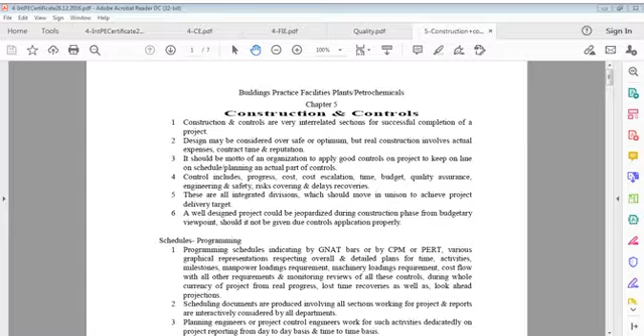So it's coming to your revised file of health safety, and it's coming to your revised file now. This is here, you can see it's a revised file of safety which I'm talking about, and this is health safety environment - I just put in there about COVID, and this is very much an engineering issue, we cannot avoid it.

I say 50% of world infections are in India, Bharat - why? Medicines, oxygen issue, hospitals, beds issue, doctors, nurses issue, ventilators issue, infections millions daily.

What we should do, that's a question mark, and we have to think on this. If we do not think, we do not do justice to ourselves. That's a very important part of this. And if we do not do justice to ourselves, we do not do justice to anybody. That's a point of concern. I don't know why people call for money.

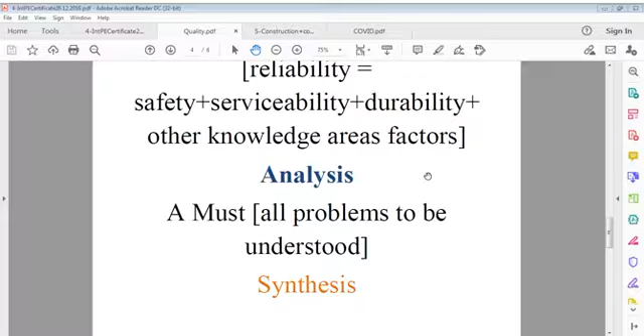There may be any number of problems in one issue. Each problem requires to be analyzed, and all analysis done for that problem must then be understood and combined when we get solutions or answers or responses, and that is called synthesis. And that is what engineering is about, all based on thinking, the activity of thinking and reiteration all the time.

And that thinking leads to formation of some format, some form, you may say, in some formation - a kind of template, and that is called in-depth thinking. Based on that template a formula is generated to solve that problem, and that's called innovative engineering, or applications must be affected - a kind of application is generated. That's the basis of engineering, which is use of mind to find solution. That's what we say.

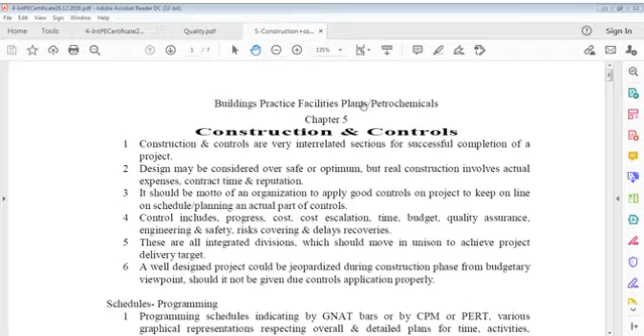I take this close of COVID-19 currently. We'll say now, as I was talking of construction and control last time, I was talking of everything in construction - how does it happen? We talked of various sites, various procurements. We talked of construction project management.

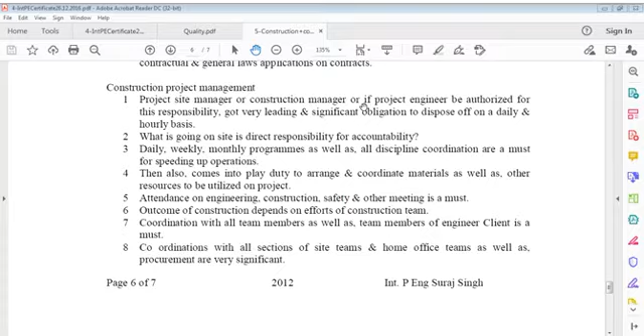And we talked so much on that. Controls, everything we talked of is all very important, and we have to understand what these are. If you don't understand these, we cannot do anything. We cannot reach a certain conclusion, and this is a very important part of life, that we have to understand that.

Then we have to see, in this, about facilities on show - I'm just trying to find this. We have talked of general topics, we have talked of project design, contract awards, and we have talked about engineering facilities, and we can say now project management, facilities, petrochemicals. Let us see what's that.

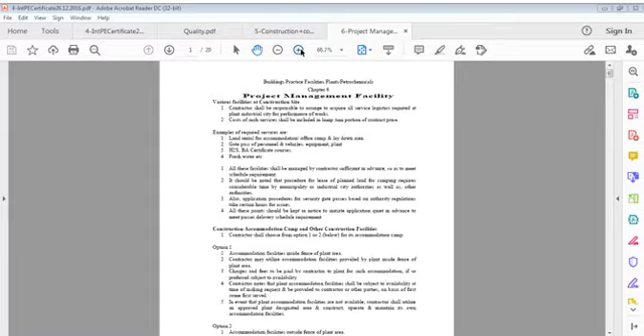Let's open this chapter now, which is, you can say, chapter 6 in this case. It says project management facility. Now, what actually is a facility? That's the point here - what we call a facility, what we call no facility. When I say facility, this means a kind of productive facility, a kind of facility of production or service. Let us say crude oil is converted to petroleum products, gasoline.

That is a facility that obtains crude oil from offshore and converts it for use for petroleum production, and there are so many byproducts, and those byproducts are further treated or produced.

Or if no project facility, I can say various facilities at construction site. Now what it says is contractor shall be responsible to arrange or acquire all service logistics required at plant, industrial city.

For performance of works. Here contractor means whoever is responsible to work for the project.

That company or organization shall be responsible to arrange, to acquire all service logistics required at plant, industrial city for performance of work.

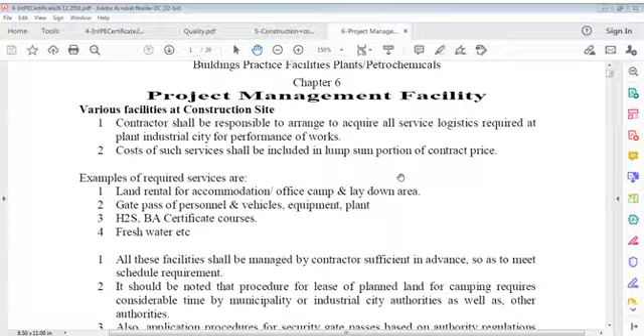Now what examples should we give about these services that can be considered like that? Land rental for accommodation, office camp and lay down area - these are essential. Gate pass of personnel and vehicles, equipment, plant - these are also mandatory.

In facility areas, which are protected or prohibited areas for the general public, these projects go on during construction, and everybody cannot enter there.

There is some control, some reservations on who can enter and who cannot enter on those projects. So you can say gate pass is a protection against unauthorized entry.

That only requires those people who have to work there to enter, only those vehicles which are authorized to enter, and that equipment I mean heavy machines like crane, mobile pump, transit mixers, trucks, excavators, or whatever else involved, and whatever plants.

And also certain certificate courses, whatever for training of personnel, and fresh water.

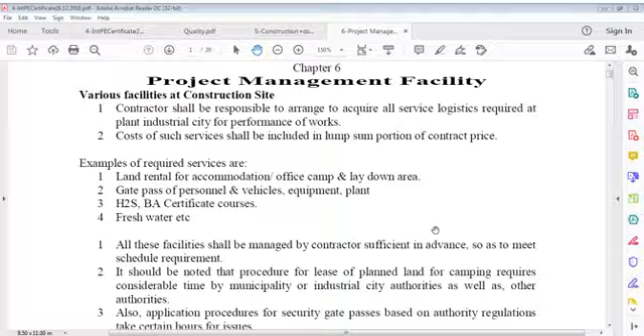This is just a small list. This is not necessary that this is all. You can add anything to that, no problem, you can add what you want to add. These facilities which are required, which are a must.

Shall have to be managed, should be provided or organized by contractor sufficiently in advance, not at the 11th hour.

According to requirement, according to schedule, managed by contractor sufficiently in advance, so as to meet schedule requirement.

It should be noted that procedure for lease of planned land for camping requires considerable time by municipality or industrial city authorities as well as other authorities.

And this depends on the location where your project is, what the procedure is, which actually the contractor should know and the authority should know, and that time must be covered.

And it should start from the very beginning, and I think during the bid stage itself this should be considered by those companies and organizations who are experienced in contracting in local areas.

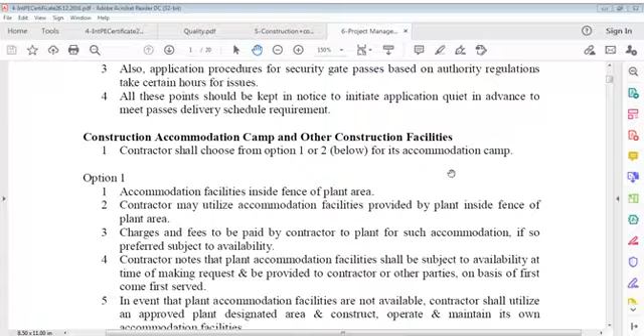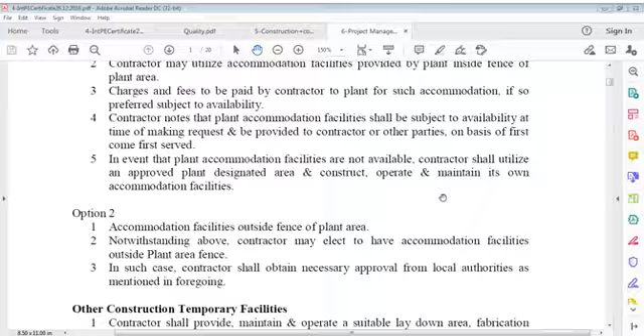Let us concentrate on these options. Just for reference, it says option 1 and option 2, but there may be more options. I am taking only these two for reference, just to inform you what should be done and what should not be done. It's not a mandate here.

Let's say accommodation facilities are inside the fence of the plant area. We have a site, a plant area, a battery limit, and it is feasible if authorities accept that you can accommodate facilities inside the plant area. This means the contractor may utilize accommodation facilities provided by the plant inside the fence. Certain facilities are there and can be used, and charges and fees are to be paid by the contractor to the plant for such accommodation, if so preferred, subject to availability.

The contractor notes that plant accommodation facilities shall be subject to availability at the time of making the request, and shall be provided to the contractor or other parties on a first come, first served basis. In the event that plant accommodation facilities are not available, the contractor shall utilize an approved plant designated area and construct, operate, and maintain its own accommodation facilities.

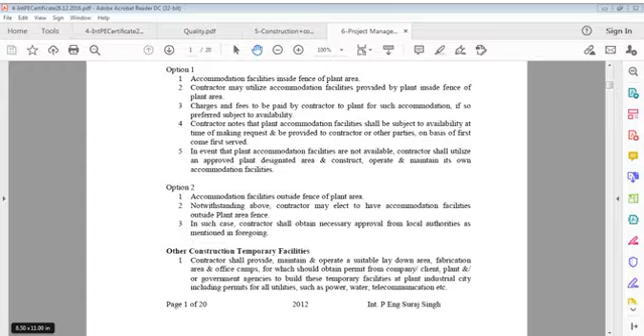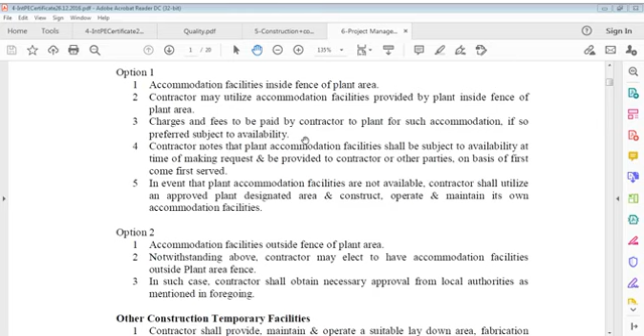As we have opted for this, we can have accommodation inside that battery limit plot, where, with permission of authorities, if there's an opportunity, we can accommodate our workers within that area, and we have to pay for all facilities according to rules. Or there's another way, that we can accommodate outside that plot if law permits in whatever country, and we have to make all expenses ourselves. So this is very common. It depends on what the contract is, what conditions are there, and what the rule is in that area, how it works.

That point is very important, we must understand it. Now, what are other procedures for these temporary facilities? We have to understand that the contractor shall provide, maintain and operate a suitable laydown area. What is a laydown area? A fabrication area. And office camps, for which it should obtain permit from the company, client, plant and government agencies to build these temporary facilities at the plant industrial city, including permits for all utilities such as power, water, telecommunication, etc.

Now, the question is, what do we do with the laydown area? The laydown area is always of considerable size where facilities are constructed. We have to not only lay down construction material, but also equipment, machines, and sometimes big quantities of structural steel, and many other items there. Sometimes it looks like everything is kept there. The laydown area is that important, and equipment, machines, materials, or vessels could stay there for months.

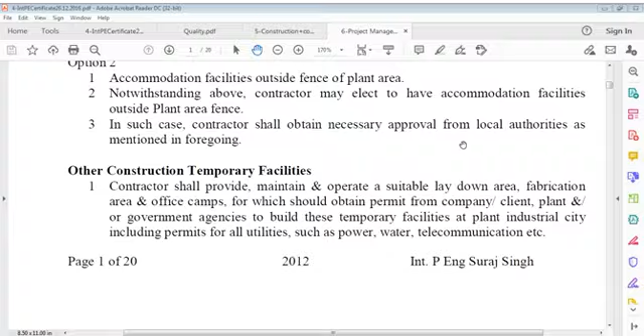Then we also need a fabrication area. We have to fabricate our structural steel, our steel reinforcement, and other things. We also have to provide offices, such as the contractor's office, engineer's office, subcontractor office, warehouses, temporary warehouses, stores, and so on, for which we must obtain permission from the client, company, and if required, government, to build these temporary facilities for a certain period of the contract at the plant industrial city, including permits for all utilities such as power, water, telecommunication, and whatever services we take. For all utilities, we have to pay accordingly, and this is required because without this, nothing moves.

We can then proceed in accordance with latest health, environment and safety standards, for which company or client shall assist contractor by issuing an introductory letter addressed to authorities. Contractor shall submit office accommodation and laydown area requirements for company or client's approval after contract award.

This means if, as a contractor, I have to apply to authorities who give permission, they are responsible for safety, health, environment. We have to apply to those companies or clients or authorities, and they do not know me, but they know my client. So I have to first go to my client to get a support letter according to contract, and that client must help me go to that authority for approval. When my client gives me that permission through the engineer or representative, I can apply for land issue for these facilities and other issues. So these temporary facilities I have to produce based on that land if I get it, and the contractor shall utilize these temporary facilities for the purpose of the project only.

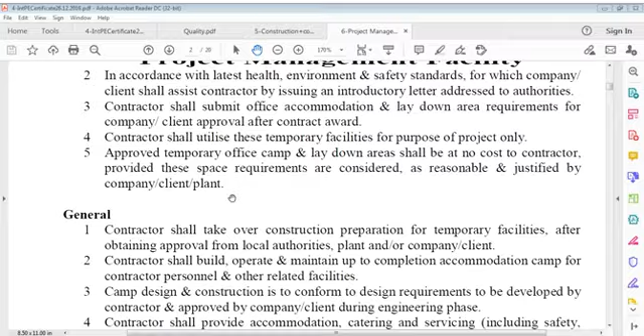These approved temporary office camps and laydown areas shall be at no cost to contractor, provided these requirements are considered as reasonable and justified by company. It depends on the contract you have. If it is free, okay fine. If it's not free, you have to pay for that.

Now we are going to general. Contractors shall take over construction preparation for temporary facilities after obtaining approval from local authorities, plant, and or company/client, meaning you have to make your own plan. You can call it a kind of mobilization plan, to accommodate your people and construct whatever temporary structures you want for temporary facilities. You have to take approval from local authority, plant authority, or whoever is competent to give you approval.

Contractors shall build, operate and maintain up to completion, accommodation camp for contractor personnel and other related facilities. This means it's your duty to maintain your camp, operate and maintain it, keep it tidy, keep it according to safety standards, keep it so health is not impacted, and the environment should be good. Camp design and construction must conform to design requirements to be developed by contractor and approved by company or client during engineering phases.

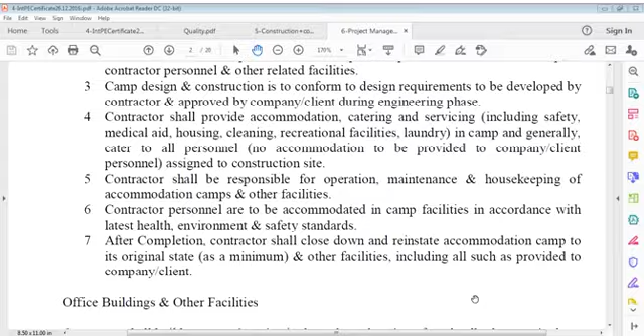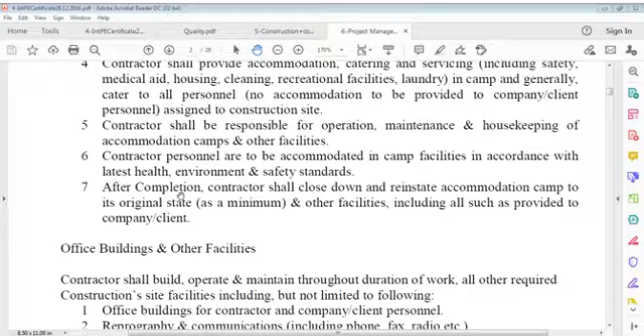Contractor personnel are to be accommodated in camp facilities in accordance with latest health, environment and safety standards. After completion of works, contractor shall close down and reinstate the accommodation camp to its original state as a minimum, and other facilities including all such as provided to company or client, once the project requirement is over.

Office buildings and other facilities is a specialized item now. Contractors shall build, operate and maintain throughout duration of work all other required construction site facilities, including but not limited to the following - meaning this list is available, but it's not a limited list. Office buildings for contractor and company client personnel.

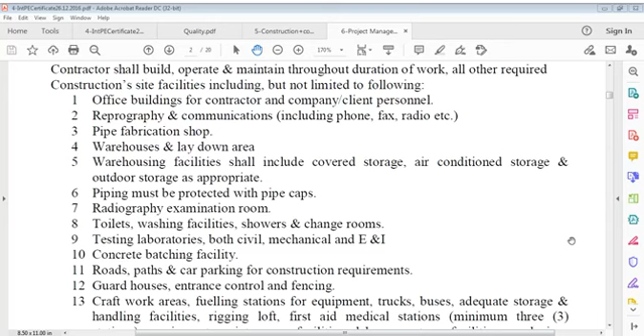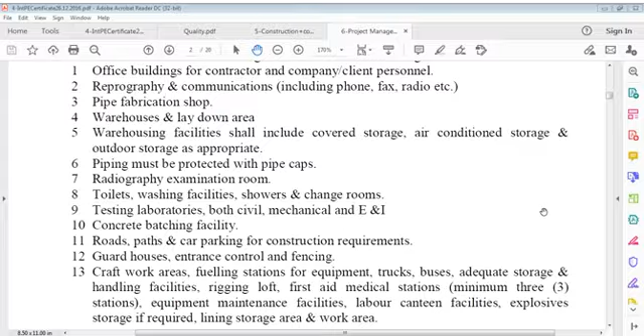Reprography and communications, including phone, fax, radio, etc. Pipe fabrication shop. Warehouses and laydown area. Warehousing facility shall include covered storage, air conditioned storage and outdoor storage as appropriate. Piping must be protected with pipe caps. Radiography examination room. Toilets, washing facilities, showers and change rooms. Testing laboratory, both civil, mechanical and E&I.

Concrete batching facility or batching plant. Roads, paths and car parking for construction requirements. Guard houses, entrance control and fencing. Craft work areas, fueling stations for equipment, trucks, buses, adequate storage and handling facilities. Rigging loft, first aid medical stations, minimum 3 stations. Equipment maintenance facilities, labor workers' canteen facilities, explosives storage if required, lining storage area and work area. Steel fabrication area, civil prefabrication work area, grit blasting, painting shop, utilities such as power, water, air, etc.

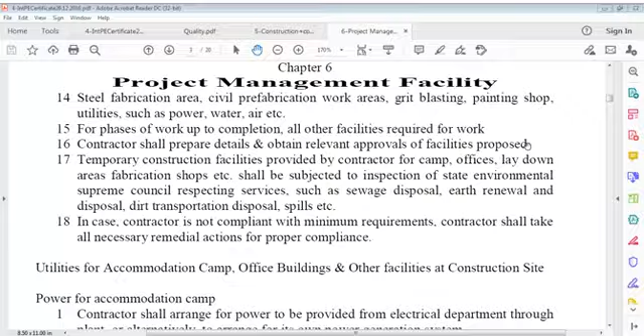For phases of work up to completion, all other facilities required for work. Contractor to prepare details and obtain relevant approvals of facilities proposed. Temporary construction facilities provided by contractor for camp offices, laydown area, fabrication shops, etc. shall be subjected to inspection of State Environment Supreme Council respecting services such as sewage disposal, earth removal and disposal, dirt transportation, disposal, and spills. In case contractor is not compliant with minimum requirements, contractor shall take all necessary remedial actions for proper compliance.

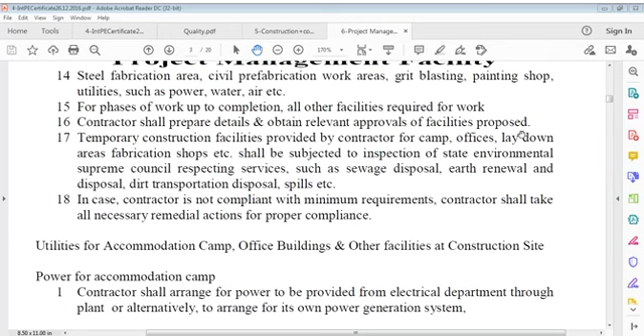This is a limited list, only a limited list. You revise this and see just how specific it is. But it can be anything, we repeat. In this office building, then there is reprography and communication. Just a minute please - reprography.

Reprography is reproduction of graphics through mechanical or optical means such as photography or xerography. Reprography is commonly used in catalogs and archives as well as in architectural engineering. Actually, it is paribhasha, it is the definition that it says. So communications is the main point here.

Then there's a pipe fabrication shop or other fabrication shop, you can say, if not pipe, steel fabrication shop could be. There could be warehouses which store items. There's a laydown area, and this includes storages which are covered as well as otherwise. Then air conditioned storage is also available, must be available for some items. Outdoor storage is appropriate, and piping must be protected with pipe caps, and we have to protect steel reinforcement also.

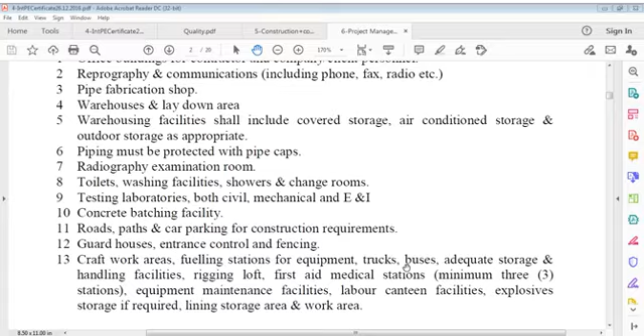That yard, steel reinforcement yard, there may be carpentry or formwork fabrication yard, there may be some other yard. Radiography examination room - there may be a radiography working room with embankment around it for protection from radiation, and also this radiography examination room, toilets, washing facilities, showers, change rooms - these are very important. Toilets are basics, very basic, and washing facilities and showers, you can say changing rooms, etc.

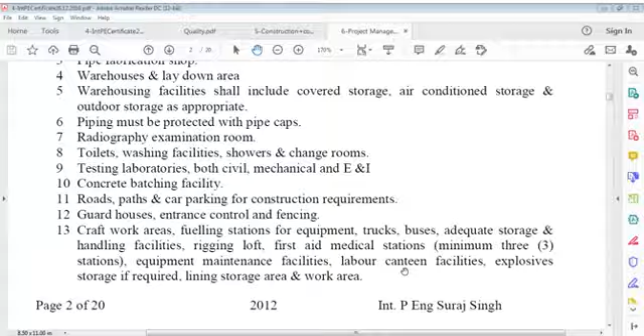Testing laboratories, both civil, mechanical and E&I testing methods. Testing laboratory, both civil, mechanical, E&I. Concrete batching plant is a very big item. It is very important and it must be there as possible outside. And roads, paths and car parking for construction requirements.

Guard houses, entrance control and fencing. Craft work areas, fueling stations for equipment, trucks, buses, adequate storage and handling facilities, rigging loft, first aid medical stations - minimum 3 stations should be there, equipment maintenance facilities, workers' canteen facilities, and significance like that.

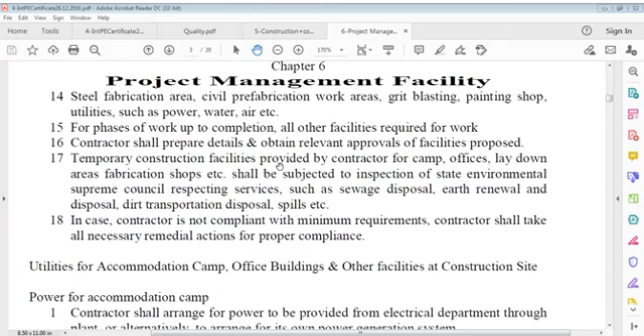Steel fabrication area, civil prefabrication work areas, civil fabrication work areas, grit blasting, and painting shop, utilities such as power and water for phases of work up to completion. We may say all other facilities required for work. Contractor shall prepare details and obtain relevant approvals of facilities proposed. Temporary construction facilities provided by contractor, such as camps, offices, laydown areas, fabrication shops, shall be subject to inspection of the State Environment Supreme Council.

Respecting services such as sewage disposal, earth removal and disposal, transportation and disposal of spills. In case the contractor is not compliant with minimum requirements, then we can say utilities for accommodation, camp, office buildings, and other facilities at construction site.

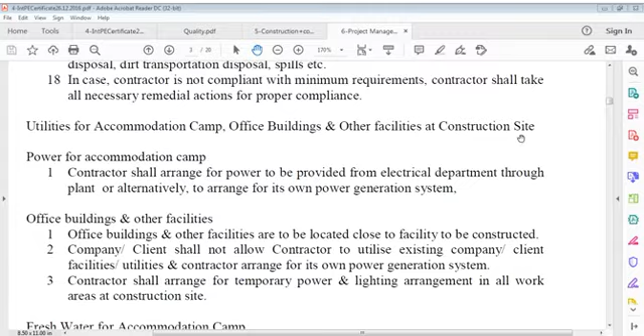Now we'll go through that. A contractor shall arrange for power to be provided from the electrical department through plant, or alternatively arrange for its own power generation system. Office buildings and other facilities are to be located close to the facility to be constructed.

Office buildings and other facilities are to be located close to the facility being constructed. Company or client shall not allow contractor to utilize existing company or client facilities or utilities, and contractor shall arrange for its own power generation system. Contractor shall arrange for temporary power and lighting arrangements in all work areas at the construction site.

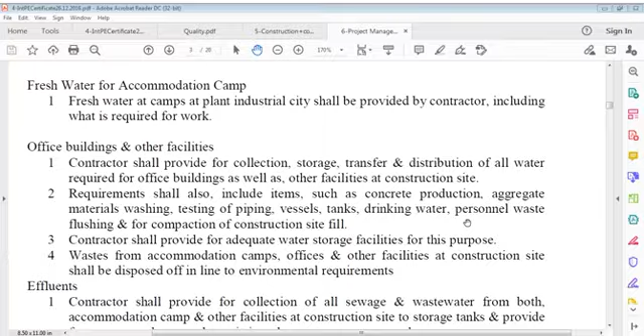Office buildings and other facilities: contractors shall provide for collection, storage, transfer and distribution of all water required for office buildings as well as other facilities at construction site. Requirements shall also include items such as concrete production, aggregate materials washing, testing of piping, vessels and tanks, drinking water, personal waste flushing, and compaction of construction site fill.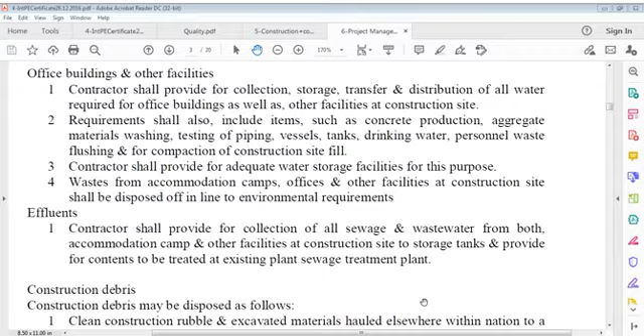Requirements shall also include items such as concrete production, aggregate materials washing, testing of piping, vessels, tanks, drinking water, personnel waste flushing, and for compaction of construction site fill. Contractor shall provide adequate water storage facility for this purpose. Wastes from accommodation camps, offices and other facilities at construction site shall be disposed of in line with environmental requirements.

Effluents. Contractor shall provide for collection of all sewage and wastewater from both accommodation camps and other facilities at construction site, to storage tanks, and provide for contents to be treated at existing plant sewage treatment plant, within certain limits.

Contractors will provide for collection of all sewage and wastewater from both accommodation, camp and other facilities at construction site to storage tanks, and provide for contents to be treated at existing plant sewage treatment plant.

Construction debris may be disposed of as follows: clean construction rubble and excavated materials hauled elsewhere within the nation to a site approved by company, client or relevant body.

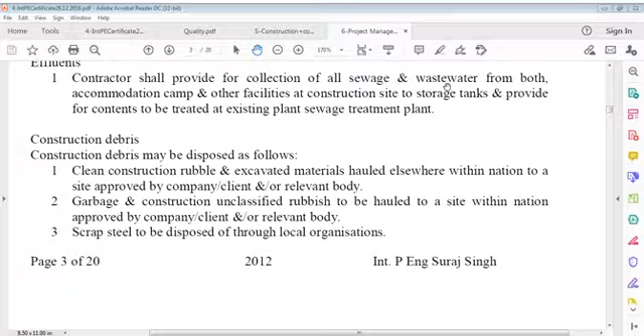Untreated sanitary waste and solid waste to be hauled to a treatment plant located at a site within the area or nation approved by company, client and/or relevant body. Contractor shall adhere to environmental guidelines and company/client environmental protection standards, and apply to relevant national public authorities for disposal of such construction debris, in support of which application the company or client would provide a letter of introduction.

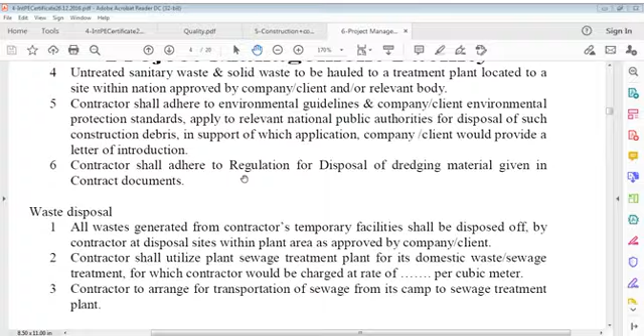Then you can say contractor shall utilize plant sewage treatment system for its domestic waste sewage treatment, for which contractor would be charged at a rate of whatever per cubic meter. Contractor to arrange for transportation of sewage from its camp to the sewage treatment plant.

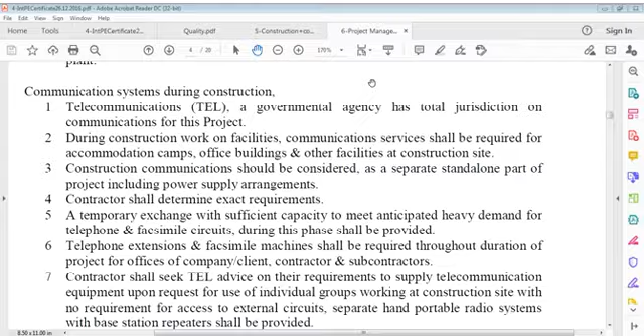Telecommunication means communication systems during construction. A governmental agency has total jurisdiction on communications for this project, if applicable, is a consideration here. During construction work on facilities, communication services shall be required for accommodation camps, office buildings and other facilities at the construction site.

Construction communications should be considered as a separate standalone part of the project, including power supply arrangements. Contractors shall determine exact requirements.

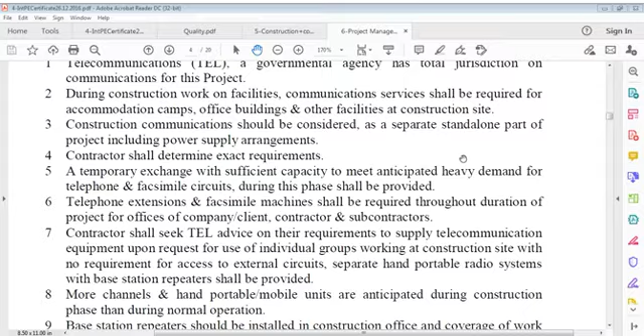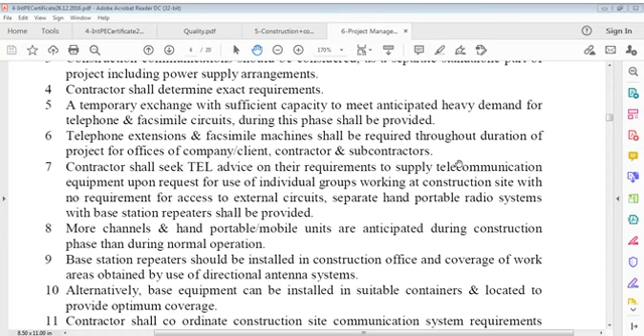A temporary exchange with sufficient capacity to meet anticipated heavy demand for telephone and facsimile circuits during this phase shall be provided. Telephone extensions and facsimile machines shall be required throughout the duration of the project for offices of company, client, contractor and subcontractors.

Contractors shall seek TEL advice on their requirements to supply telecommunication equipment upon request for use of individual groups working at the construction site with no requirement for access to external circuits. Separate hand portable radio systems with base station repeaters shall be provided.

Contractors shall seek TEL advice on their requirements to supply telecommunication equipment upon request for use of individual groups working at the construction site with no requirement for access to external circuits. Separate hand portable radio systems with base station repeaters shall be provided. More channels and hand portable mobile units are anticipated during the construction phase than during normal operation.

Base station repeaters should be installed in the construction office and coverage of work areas obtained by use of a directional antenna system. Alternatively, base equipment can be installed in suitable containers and located to provide optimal coverage.

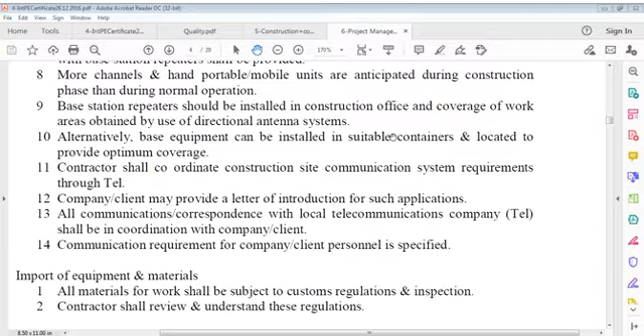Contractors shall coordinate construction site communication system requirements through TEL. Company client may provide a letter of introduction for such applications. All communications correspondence with the local telecommunications company shall be in coordination with company client. Communication requirements for company client personnel is specified.

Import of equipment and materials. All materials for work shall be subject to customs, regulations and inspection. Contractor shall review and understand these regulations.

Contractor to note that the certificate of origin must be endorsed by a Chamber of Commerce and ratified or legalized by a national embassy or consulate. National Customs shall reject all such documents not ratified by a national embassy or consulate. Contractor to arrange authentication and legalization of such documents.

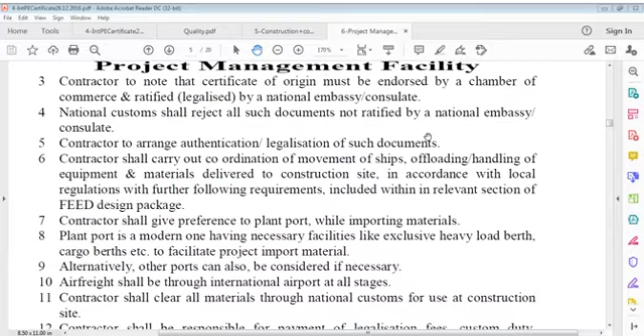Contractor shall carry out coordination of movement of ships, offloading, and handling of equipment and materials delivered to the construction site in accordance with local regulations, with further requirements included within the relevant section of the FEED design package.

Contractor shall give preference to plant port while importing materials. Plant port is a modern one having necessary facilities like exclusive heavy load berth, cargo berths, etc. to facilitate project import materials.

Alternatively, other ports can also be considered if necessary. Air freight shall be through international airport at all stages. Contractor shall clear all materials through national customs for use at the construction site. Contractor shall be responsible for payment of legalization fees, customs duty, customs clearance, etc.

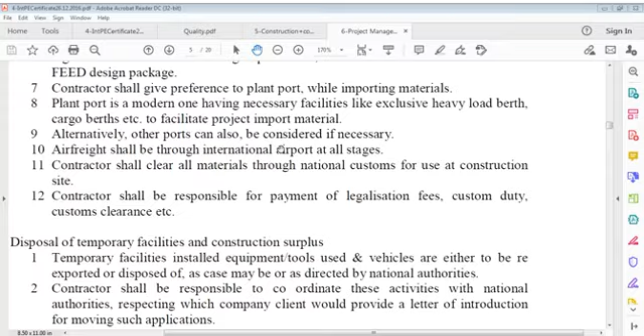Disposal of temporary facilities and construction surplus. Temporary facilities installed, equipment, tools used and vehicles are either to be re-exported or disposed of, as the case may be, or as directed by national authorities. Contractors shall be responsible to coordinate these activities with national authorities, for which company client would provide a letter of introduction for moving such applications.

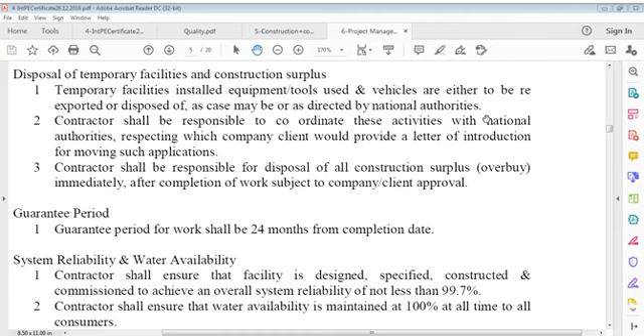Contractor shall be responsible for disposal of all construction surplus or leftover material immediately after completion of work, subject to company client approval. Guarantee period for work shall be 24 months from completion date.

System reliability and water availability. Contractor shall ensure the facility is designed, specified, constructed and commissioned to achieve an overall system reliability of not less than 99.7%.

This is to make sure that contractor shall ensure facilities designed, specified, constructed and commissioned achieve an overall system reliability of not less than 99.7%. Contractor shall ensure that water availability is maintained at 100% at all times to all consumers.

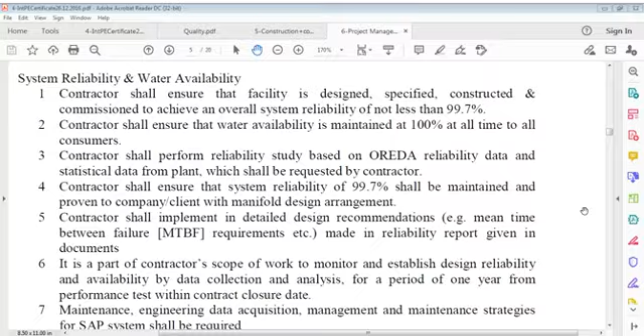Contractor shall perform a reliability study based on OREDA reliability data and statistical data from the plant, which shall be requested by contractor.

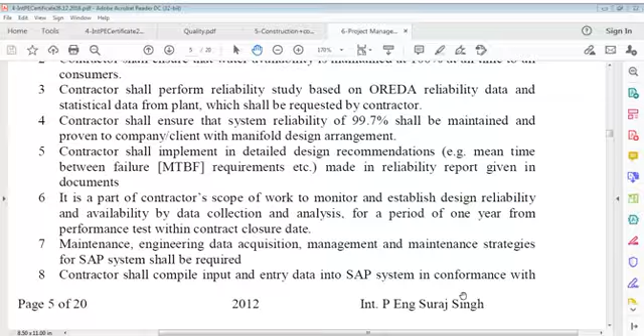It's a part of contractor's scope of work. Contractor shall implement in detailed design recommendations, namely mean time between failure requirements made in reliability report given in documents. It's a part of contractor's scope of work to monitor and establish design reliability and availability by data collection and analysis.

It's a part of contractor's scope of work to monitor and establish design reliability and availability by data collection and analysis for a period of 1 year from performance test within contract closure date.

Maintenance engineering data acquisition, management and maintenance strategies for SAP system shall be required. Contractor shall compile, input and enter data into SAP system in conformance with project management control and administration.

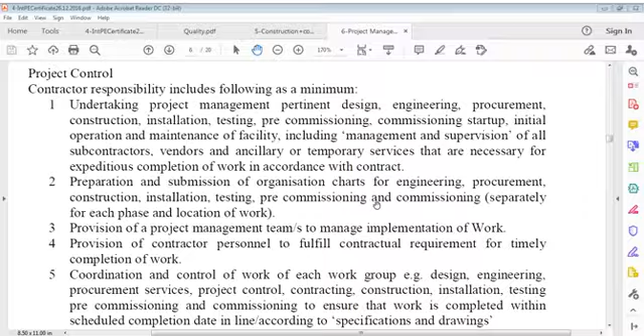Coordination and control of work of each work group, that is design group, engineering group, procurement group, services, project control, contracting, construction, installation, testing, pre-commissioning and commissioning, all groups to ensure that work is completed within scheduled completion date in line according to specifications and drawings. Implementation of a safety program throughout execution of work.

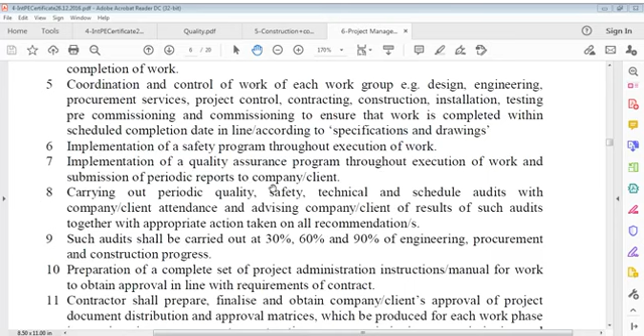Implementation of a safety program throughout execution of work, and before that is coordination, control of work, which work groups: design, engineering, procurement, services, project control, contracting, construction, installation, testing and commissioning, to ensure that work is completed within scheduled completion date in line according to specifications and drawings. Implementation of safety program throughout execution of work.

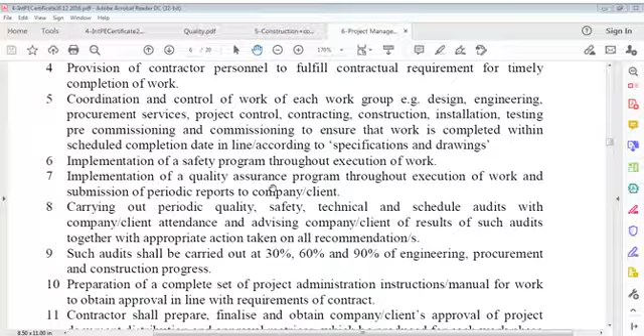Implementation of a quality assurance program throughout execution of work, and submission of periodic reports to company or client, carrying out periodic quality, safety, technical and schedule audits with company client attendance, and advising company client of results of such audits together with appropriate action taken on recommendations.

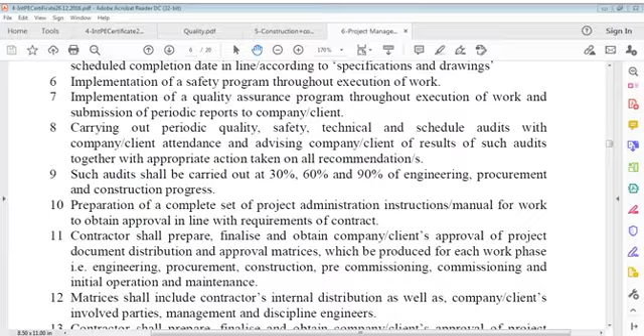Then you can say, preparation of a complete set, such as carrying out periodic quality, safety, technical and schedule audits with company client attendance, and advising company client of results of such audits together with appropriate actions taken on all recommendations.

Such audits shall be carried out at 30%, 60%, 90% of engineering, procurement and construction progress. 30%, 60%, 90% of completions can be added more, depends. This is just a guide.

Preparation of a complete set of project administration instructions, manual for work, to obtain approval in line with requirements of contract. Contractors shall prepare, finalize and obtain company client's approval of project document distribution and approval matrices, which be produced for each work phase: engineering, procurement, construction, pre-commissioning, commissioning and initial operation and maintenance. Matrices shall include contractors' internal distribution as well as companies, clients, involved parties, organization management and discipline engineers.

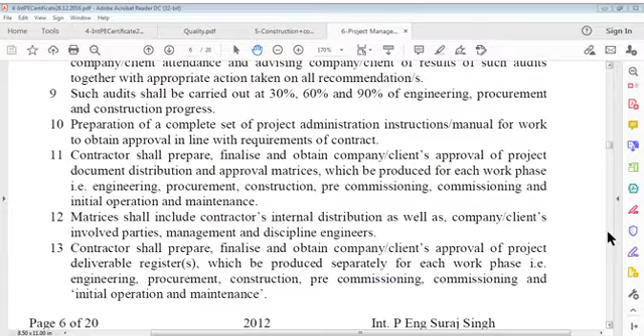Contractors shall prepare, finalize and obtain company client approval of project deliverables registers, which are produced separately for each work phase: engineering, procurement, construction, pre-commissioning, commissioning and initial operation and maintenance.

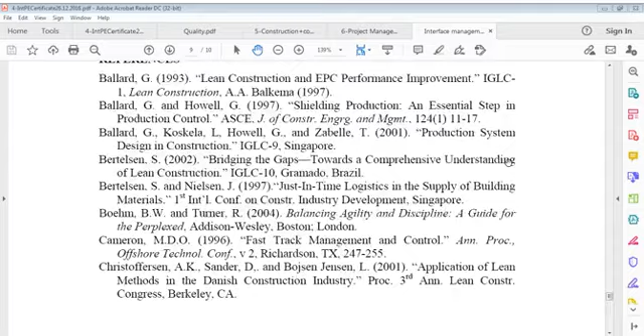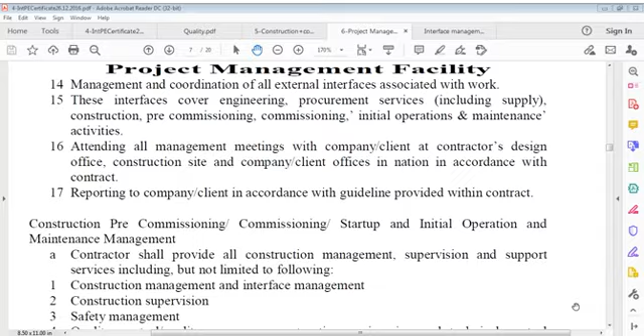Okay, I'm just going through this. So you can say management and coordination. Management and coordination of all external interfaces associated with work. These interfaces cover engineering, procurement services including supply, construction, pre-commissioning, commissioning, initial operations and maintenance activities, attending all management meetings with company client at contractor's design office, construction site and company client offices in nation in accordance with contract, reporting to company client in accordance with guideline provided within contract.

Construction, pre-commissioning, commissioning, startup, initial operations and maintenance management. Contractor shall provide all construction, organization management, supervision and support services including but not limited to the following: construction management and interface management, construction supervision, safety management, quality control, quality assurance, construction engineering and technical control systems services, material control and warehousing, management of subcontractor and vendors, third-party controls and dispatch services, third-party inspection services, disposal of construction surplus materials, dismantling and disposal of construction aids and temporary facility, except otherwise directed by company client.

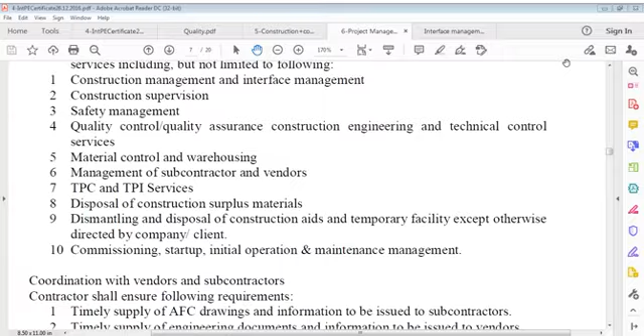Disposal of construction surplus materials, dismantling and disposal of construction aids and temporary facility except otherwise directed by company, commissioning, startup, initial operations and maintenance management.

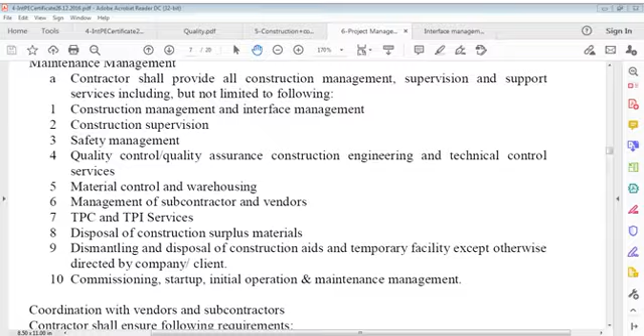Again I read this, it is an important one. This is what you call it: construction, pre-commissioning, commissioning, startup, initial operation, maintenance management organization. Contractor shall provide all construction management, construction organization, supervision and support services including but not limited to given below: construction management and interface management, construction supervision, safety, quality control, quality assurance, construction engineering and technical controls services, material controls and warehousing, organization or management of subcontractor and vendors, TPC and TPI services, disposal of construction supply surplus materials, dismantling and disposal of construction aid and temporary facility except otherwise directed by company, commissioning, startup, initial operations and maintenance management.

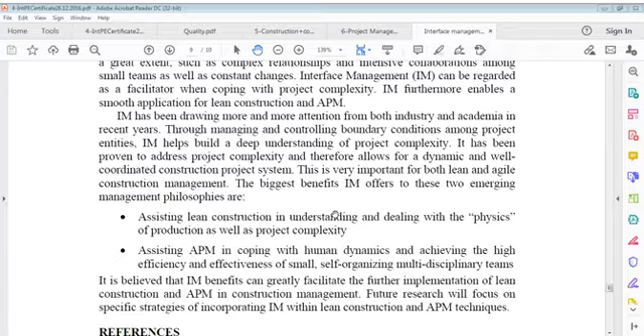The biggest benefit IM offers is assisting lean construction in understanding and dealing with the physics of production as well as project complexity, and assisting APM in coping with human dynamics and achieving high efficiency and effectiveness of small, self-organizing multidisciplinary teams. I believe that IM benefits can greatly facilitate further implementation of lean construction and APM in construction management. Future research will focus on specific strategies of incorporating IM within lean construction and APM techniques.

We'll go through later on detailed engineering.